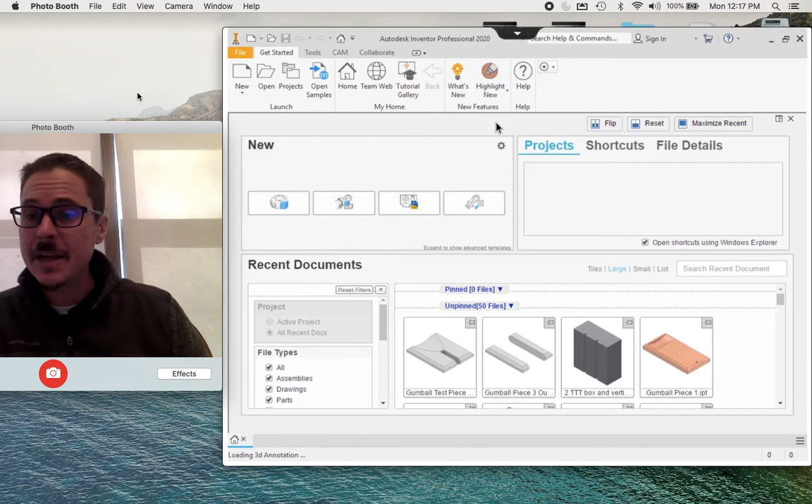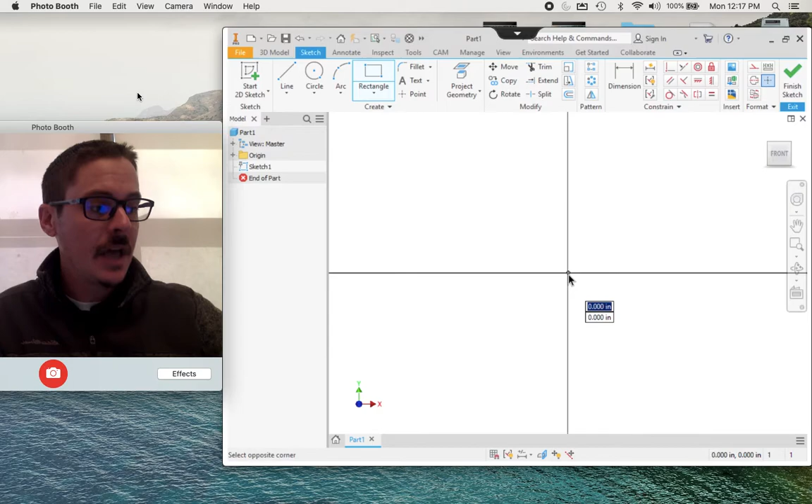So I'm going to open up the Workspaces app. I've already opened Inventor inside of here, and I'm going to create a new standard IPT. Once this loads up, we are going to start a 2D sketch on the XY plane like we've been doing. We're going to grab a 2-point rectangle, same beginning steps, and we're going to start at the origin and move our mouse into the upper right.

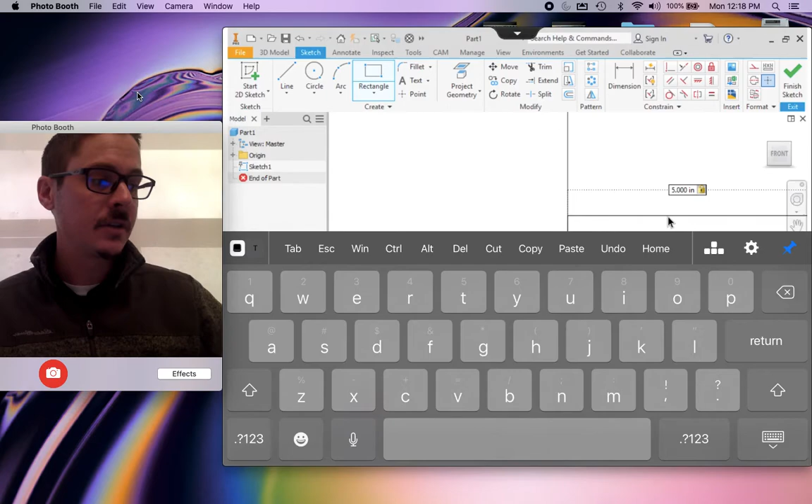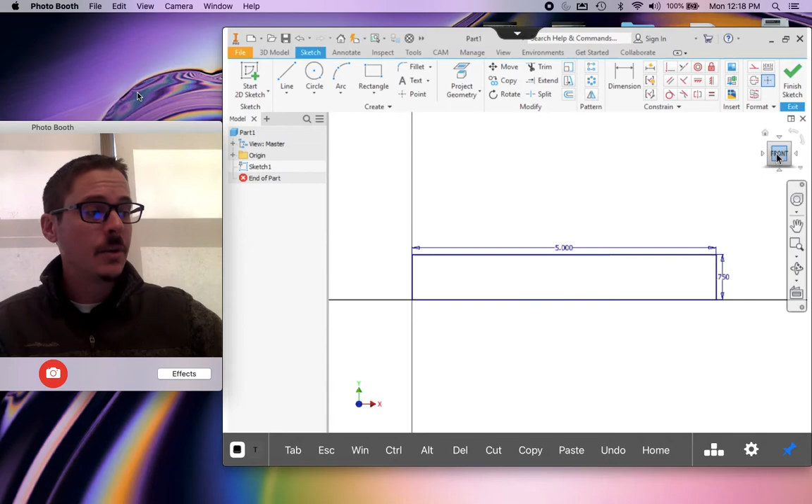So our part needs to be 5 inches wide and 0.75 inches tall. Grabbing my keyboard, I'm going to put in 5, then I'm going to hit the tab key, and I'm going to type in 0.75. Now I can hit return, drop my keyboard, drop my tool with escape, and go to the front view just to verify that we can see everything. 5 by 0.75, good to go. We're ready to finish our sketch with the green check mark. Look at our home view so that we can see everything.

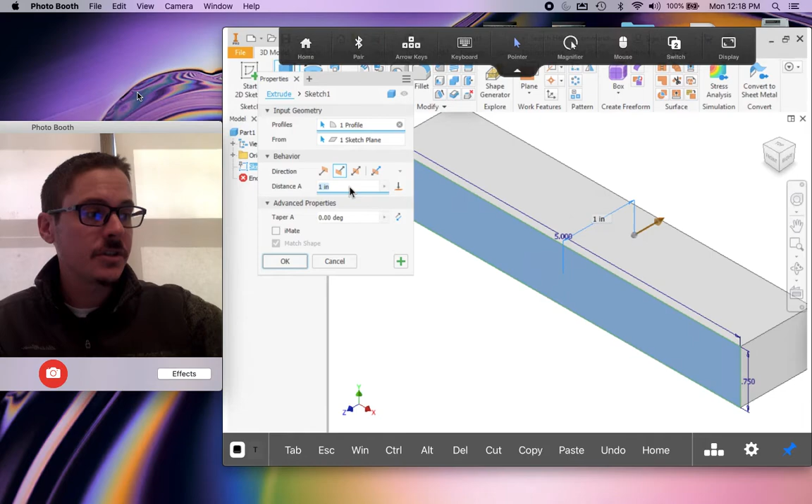And we're going to extrude this 4 inches, just like we've done with all of the other parts, going in direction 2, changing the distance to 4. Okay. Go into my home view here.

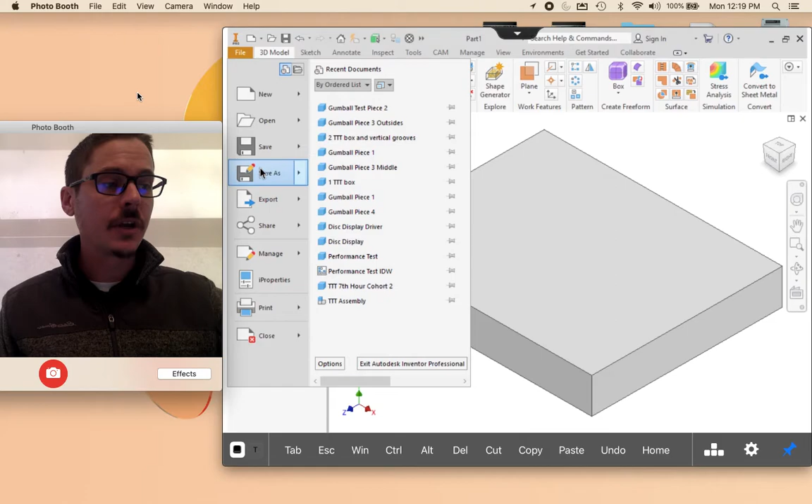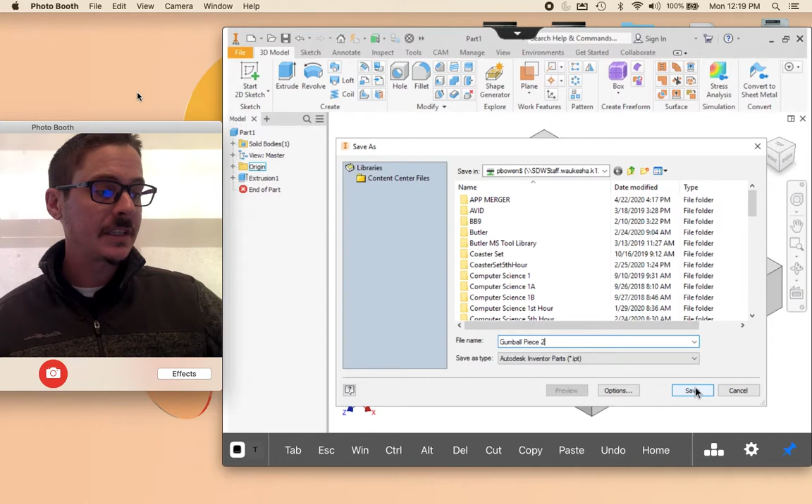Before we move on to any of the features, we want to save this. So we're going to come up to the orange file. We're going to go Save As. Double check you're going into your H drive, gray with the green symbol. And then for the part name, this is going to be Gumball Piece 2. Gumball Piece 2 into our H drive. I can go ahead and click Save. And now every time we quick save, it's always going to go to that location.

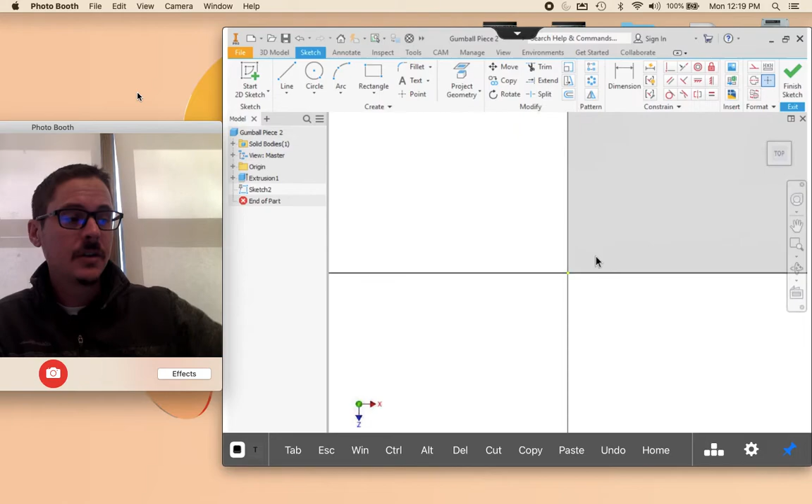So we're going to start with the groove. We're going to put the groove right here. So we're going to start a 2D sketch on the top of our part. I click on the top face. I'm going to come to my top view. We're going to draw a 2-point rectangle, and we need to be very careful where we put our first point. When I grab the 2-point rectangle and I click, I now have that tool in my hand.

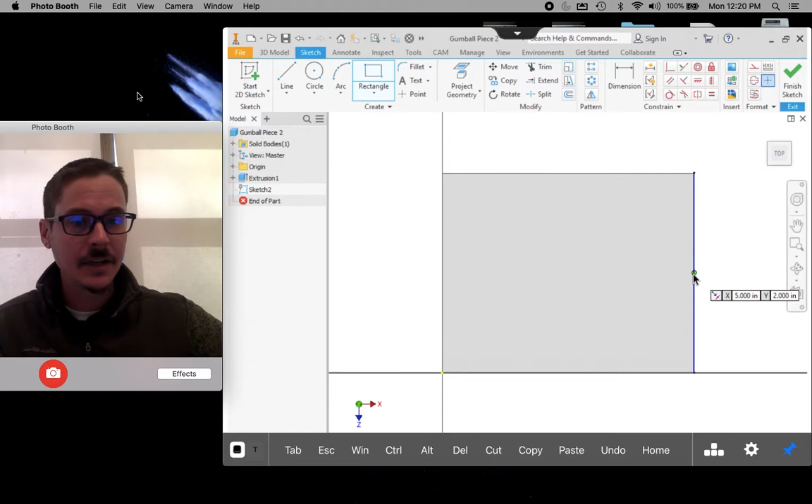I need my first point to be on this line over here, but I need to be very careful that I don't select the green dot. I don't want it attached to the midpoint. I just want it attached to the line. So somewhere about where I'm at right now, I'm going to click once to place one corner. I'm going to move my mouse up and to the left.

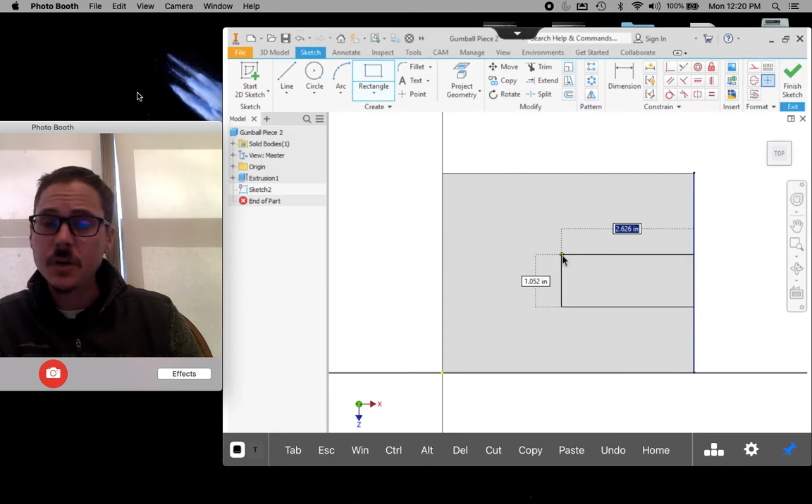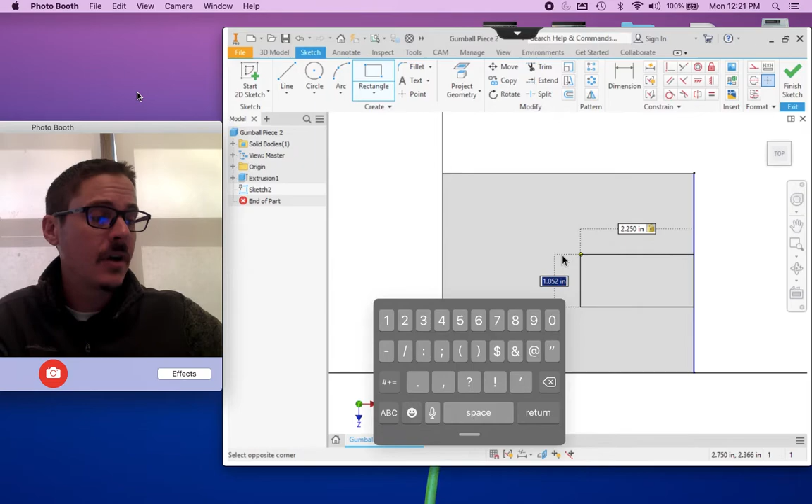So now we have to put in our distances for this groove. So our groove is 2¼ inches deep, 2.25. I'm going to use the tab key to switch to the height of the groove. And I'm actually going to pinch so that you can see. Now that we're on the height, we are going to put in 1/2 inch, which is 0.5. Now that we have the width, we have the height, we can hit return.

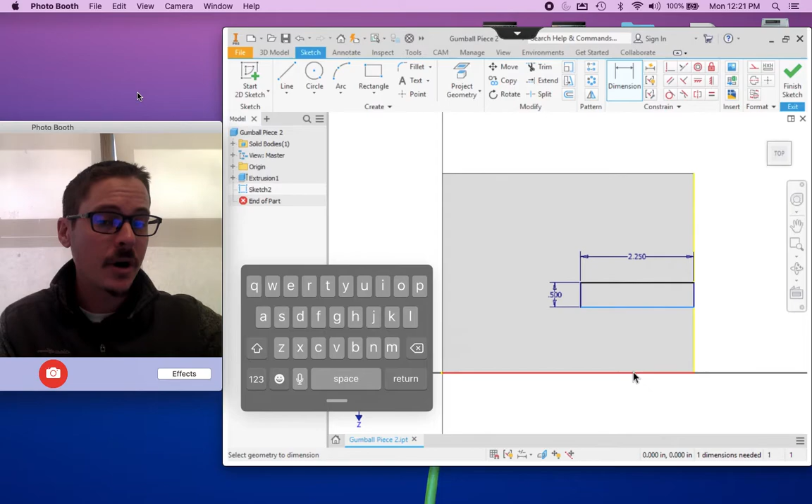So our groove, or our rectangle, looks good. It's connected to the side of our piece here. We just need to locate it up and down right now. So I'm going to grab my dimension tool, and I'm going to dimension from the bottom of this rectangle, 1 click, to the bottom of my part, 2 clicks, and I'm going to put this dimension off my part and between the arrows, 3 clicks. So this needs to be 1.75 inches from the edge. 1.75, and I can hit return.

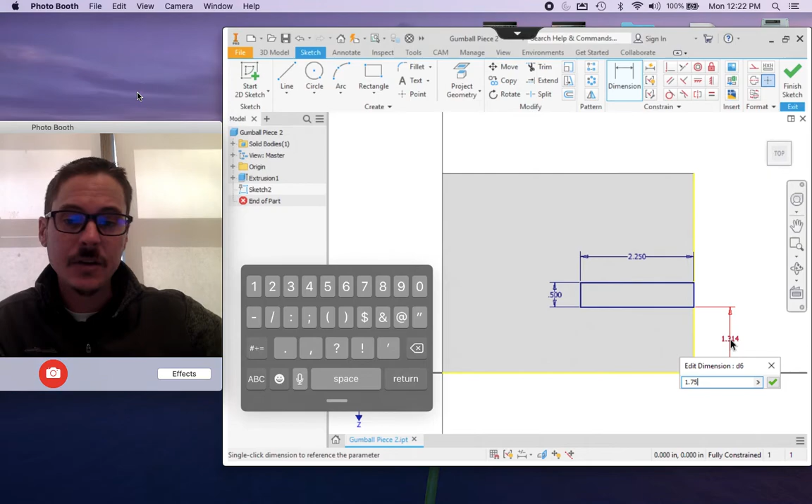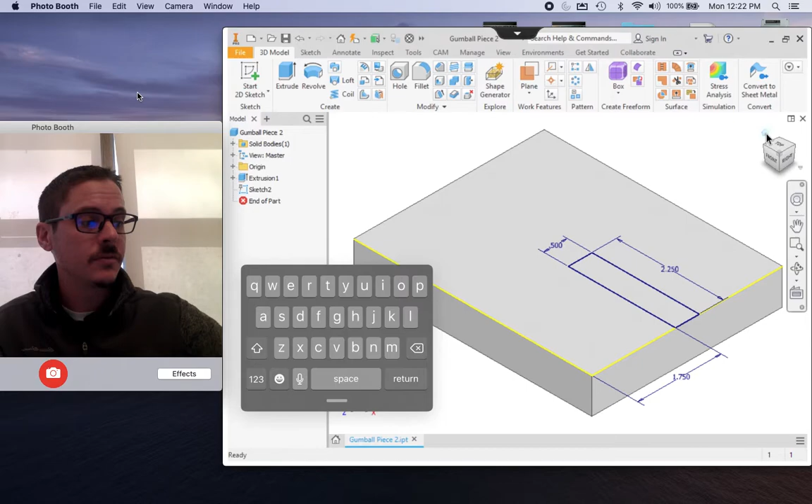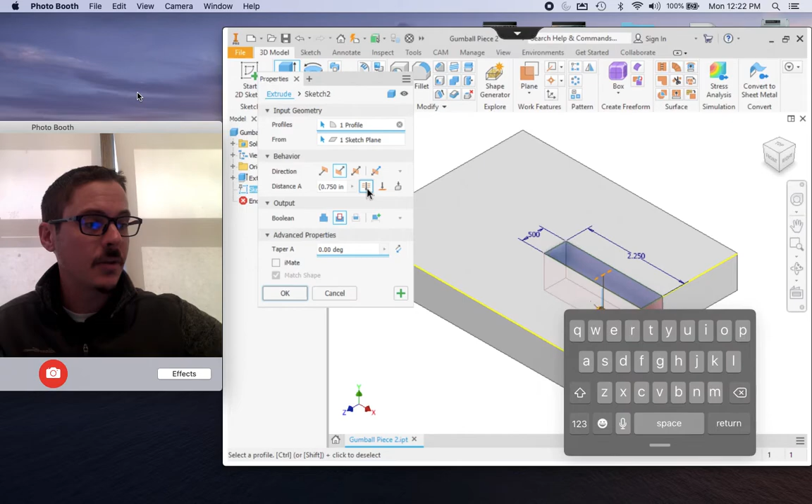Alrighty. That is the groove that we need to cut out on the bandsaw. Looks good, so let's cut it in Inventor. We're going to go to our green check mark to finish our sketch. Home view if you need to. We're going to grab the extrude tool. We're going to tell this to cut through all. So we're going to come into the cut symbol, and we're going to change the distance to be through all. Looks pretty good. Move my keyboard out of the way. Down here I can click OK, and we've cut our groove out.

Next up, before we do the slide, we want to put all of our chamfers around the edges. So I'm going to grab my chamfer tool and change the distance on the chamfer to 0.25.

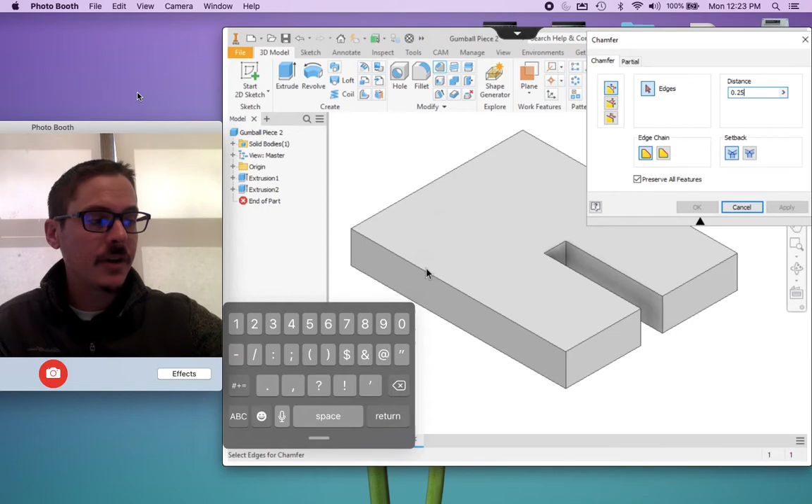And now I want to chamfer all of the top edges and all of the bottom edges. So 1, 2, 3, 4, and 5. All of the top edges. I'm going to come and hit apply.

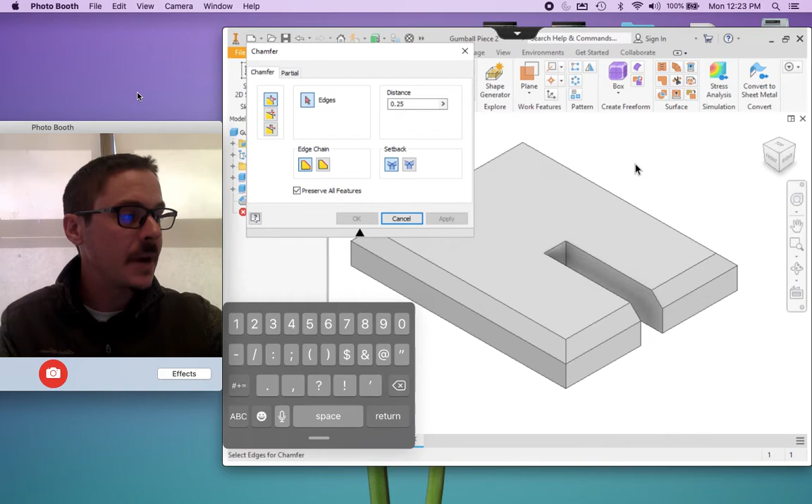I'm going to move my chamfer box out of the way a bit so that I can go to my navigation cube and click on the bottom. We need to do the same thing now. I need 1, 2, 3, 4, 5, and I'm going to hit apply.

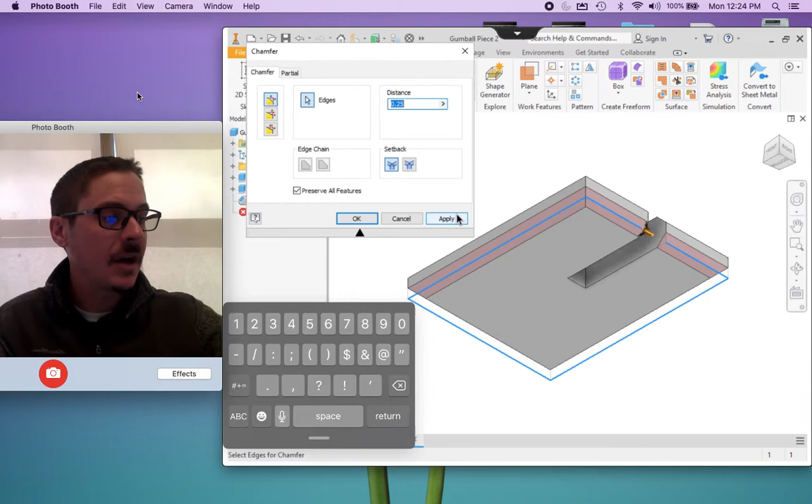Now that I've done every edge that I need for the chamfer and I've applied them, I can hit cancel and come back to my home view so that I can see my part.

Okay, we don't want to lose this, so let's come up to the save icon up here. Click the save icon and it'll automatically save it to that location you created.

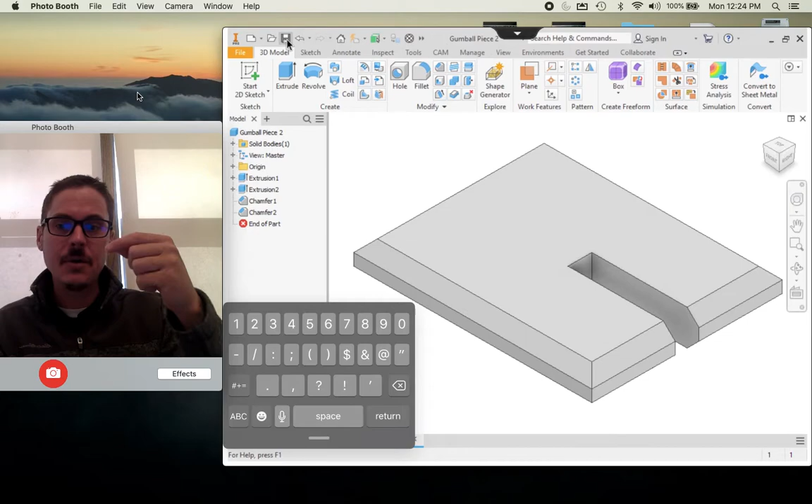We're ready to try to cut out the slide now. To do this, we need to turn our view. So from the navigation cube, I need to grab one of the back corners on that cube so that the whole part spins, because we want to draw on this face right here.

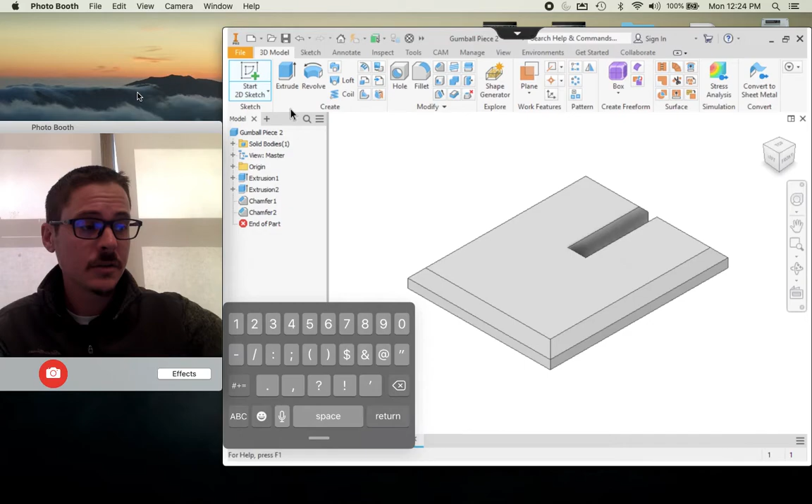So we're going to start a 2D sketch. Needs to know where, so I'm going to select that little face on the end. And I'm going to come and click on the word left so it's nice and centered.

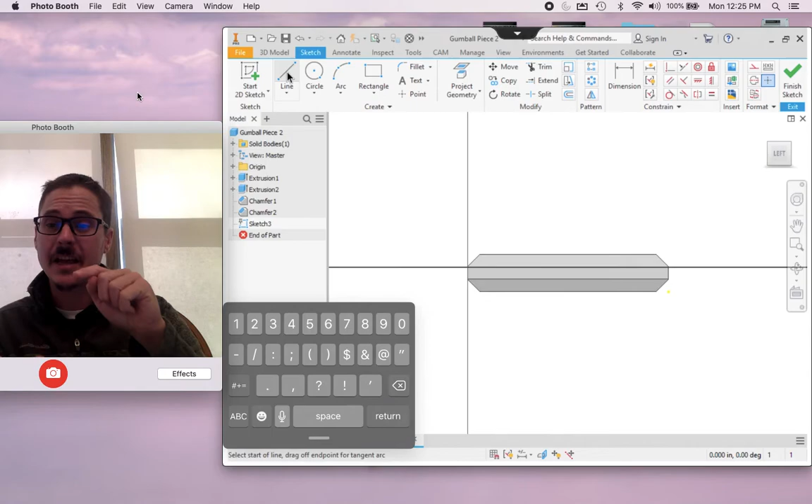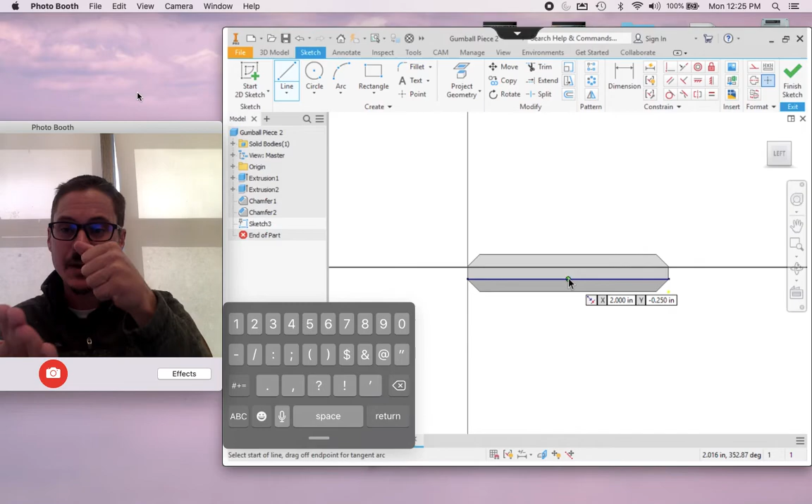Okay, we are going to take a line. The line tool needs 2 points to it. We're going to select the first point and then we're going to tell it exactly how long to be. So watch carefully. When I bring my line tool, I want to come into this line right here as shown, and I want to find that green dot that says I'm right in the middle of that line. That's where I need to start my line.

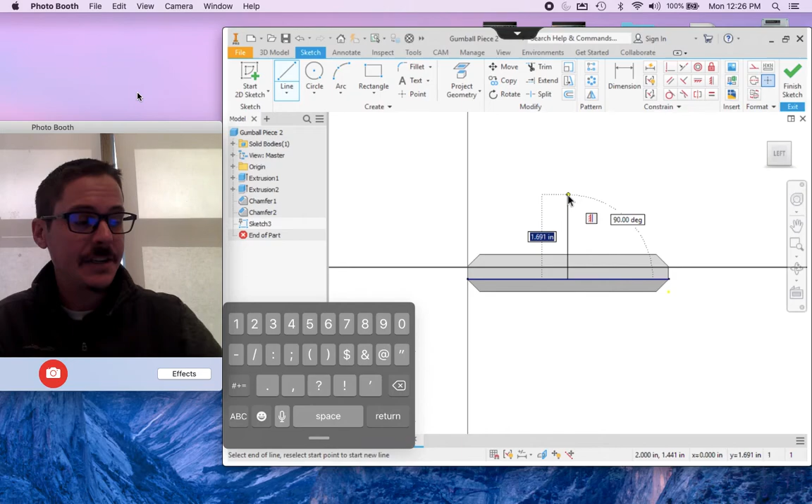So one click. Now I need my line to go straight up. So I'm going to move my mouse and I'm going to carefully turn this until it snaps to 90 degrees. I want that to be straight up before I try and type in a distance. Now that it knows to be at 90 degrees, I'm going to come into my keyboard and I'm going to make my distance 3 inches. 3, and then I can hit return.

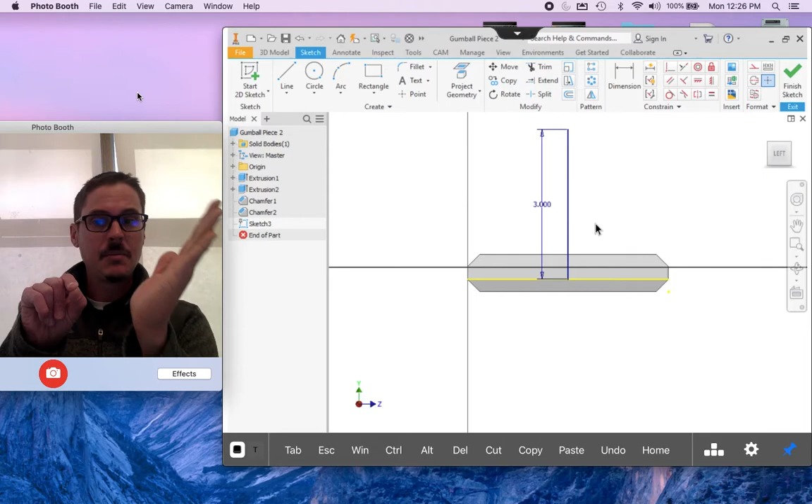Okay, I want to drop my tool so I can show you something. So I need to find my escape key. By selecting the beginning of the point, making sure it was at 90 and coming up 3 inches, we now have a very specific spot that we need for the center of our circle.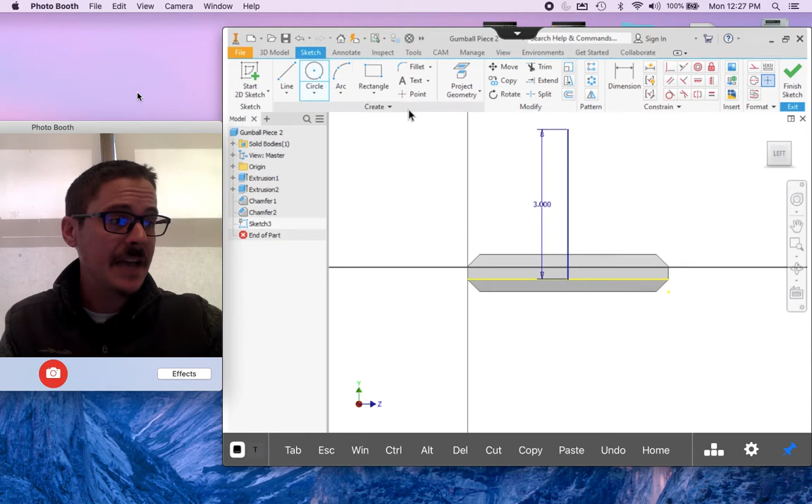So I'm going to grab my center point circle tool. The center of the circle needs to be attached to the top of this line. Once it's green at the top, you can click. And then I need to bring this all the way down to the bottom of that line. So move your mouse down, down, down, down, down until it attaches to the bottom of that line, and you can click.

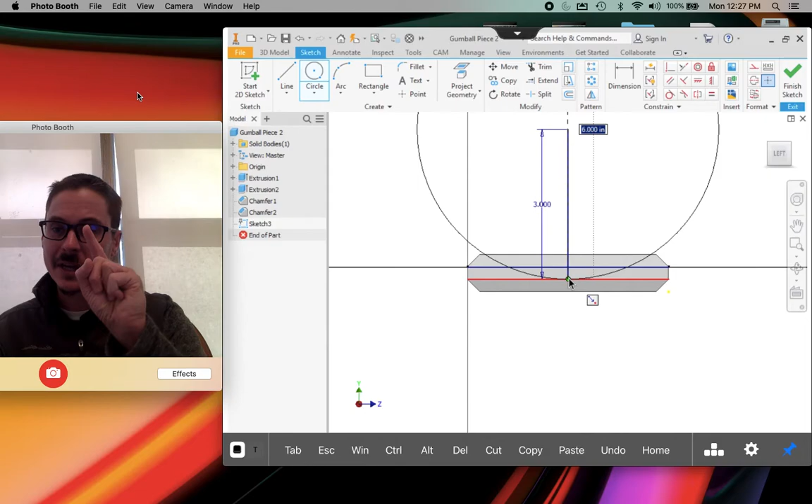So now we have the rough shape of our slide, and we're going to do a special type of extrude with this shape. So I'm going to drop my tool. We're ready to finish our sketch.

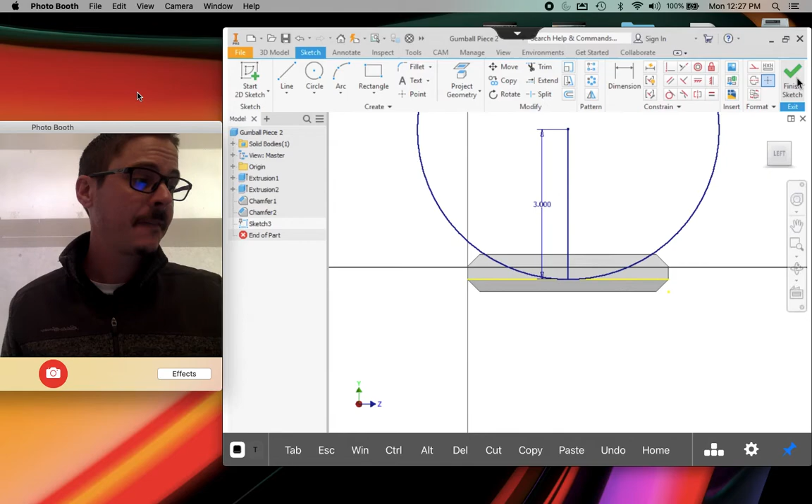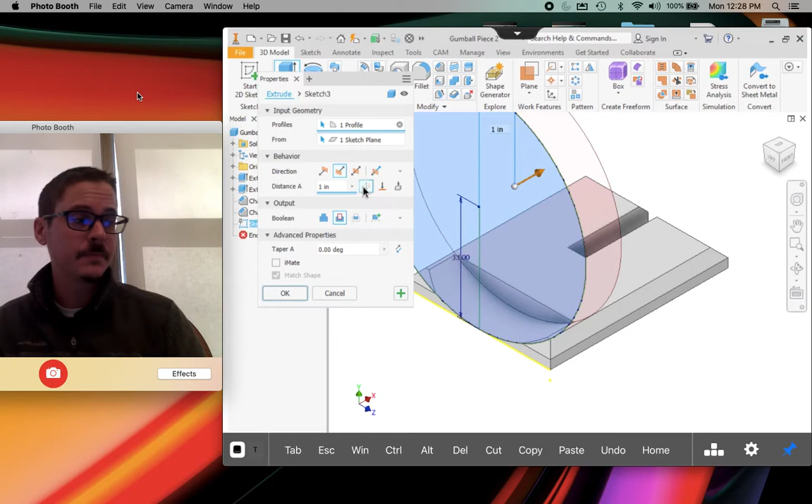We are going to extrude this. So I come to my extrude tool. We're going to tell it to cut. We're going to tell it to cut through all. Looking a little weird right now, but we're going to give this a special taper.

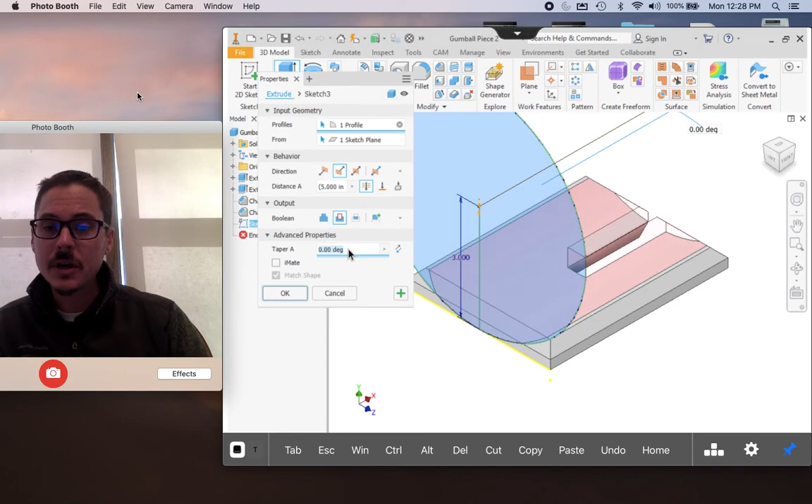So you need to make sure these advanced properties are showing. I'm not sure if yours are going to be collapsed or expanded. We need that taper right here. And we're going to put in a negative taper on this. So from my keyboard, I want to put in negative 10.5.

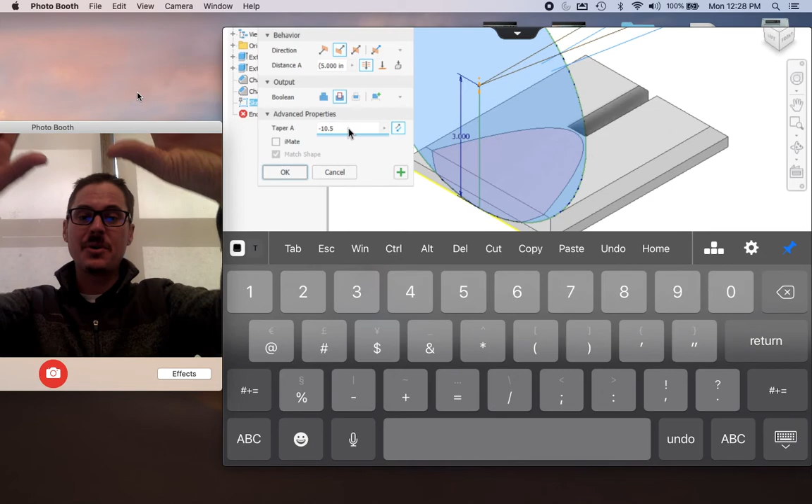So instead of cutting straight back, we are going to be cutting up at a taper, negative 10.5. So we've told this to cut, we've told it to cut through all, and we've told it to cut at a taper of negative 10.5. We can come in and click OK. We now have the chute that we need.

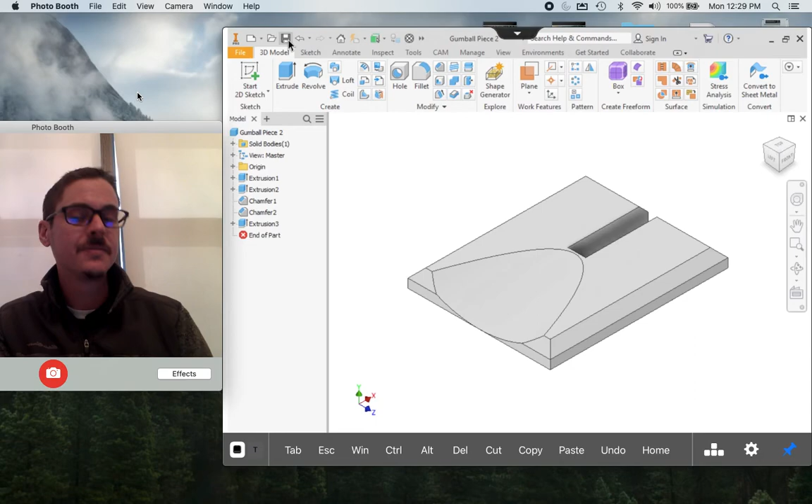So let's come up and do a quick save. And I'm going to come to my home view again.

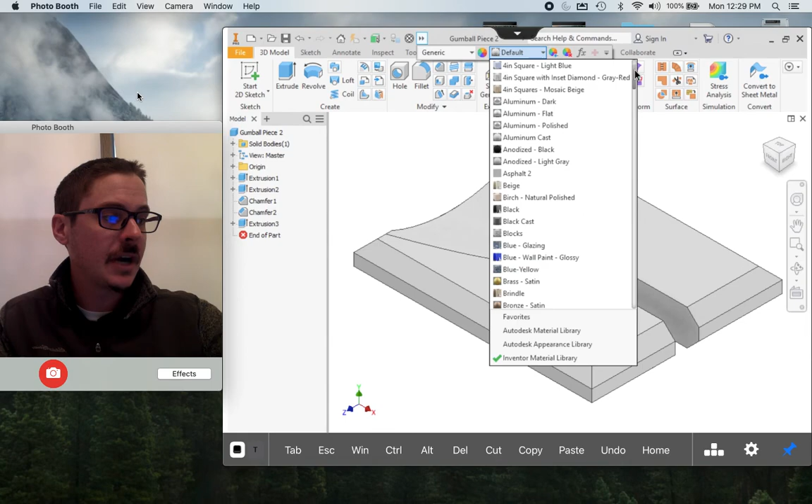Last but not least, let's pick some sort of wood for this. Maybe make it a new one than you've been using. So from the top, we're going to drop down our default. Looking through here, I see birch. I'm going to try birch for this.

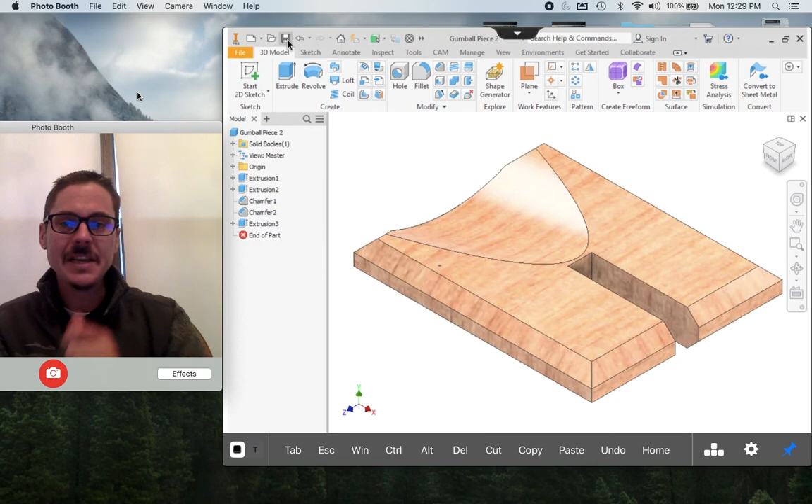I like it. Before we leave here, we want to make sure that we save our part. We now have part 2 located in our H drive. It's got the groove in the back. It's got the slide in the front. It's all saved, and we're done with this video. Good job, everyone.